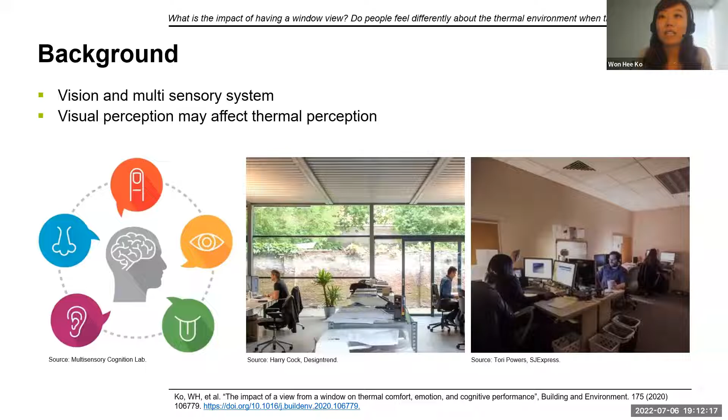So we hypothesized that having a window view versus no view would affect occupant thermal response differently.

We conducted a human subject study in a climate chamber where the system can control lighting, thermal, and ventilation conditions. By using a floor to ceiling curtain, as you can see in the picture, we created 2 different conditions, one without windows and one with windows, while keeping thermally identical spaces at 28 Celsius, a slightly warm condition. The window has 3 views, as you can see in the figure.

We recruited 86 people and exposed them to different conditions, with window versus no window, while keeping thermally identical spaces. Participants stayed in each room for about an hour while taking surveys on thermal perception, emotions, and cognitive performance tests.

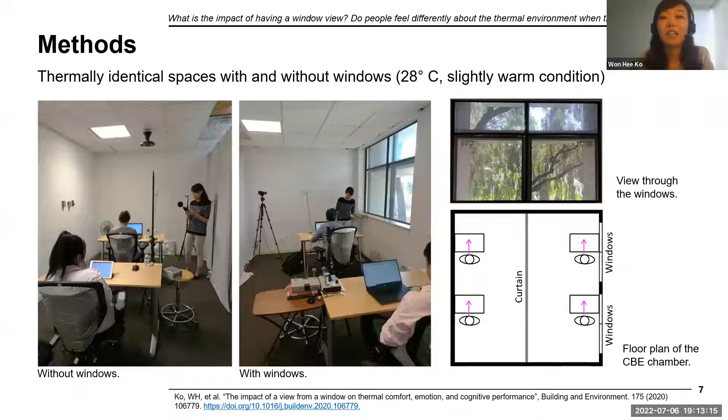When we look at the result, we found that with the windows, people felt cooler, happier, and more focused when they were in the window view room, even though we kept all environmental stimuli identical, because it was in the climate chamber at UC Berkeley CBE.

So considering these multiple effects of window access, we see that providing a window view in the workplace is important for comfort, well-being, and productivity of occupants.

The important finding here is that even though the rooms were thermally identical, people felt cooler if there was a window present. So we tried to understand how much cooler they felt.

It's about a 1 degree Celsius difference, which means 12% more people were thermally comfortable. When we simulate the building in San Francisco, California, that 1 degree Celsius difference in the thermal comfort setting results in an 8% reduction in cooling energy, as well as a 6.5% reduction in total HVAC energy.

It's really a sensational result for us, because only having a window versus no view actually makes people feel more thermally comfortable and cooler, with energy saving implications. There's also a psychological aspect, like emotions, and better work performance and concentration.

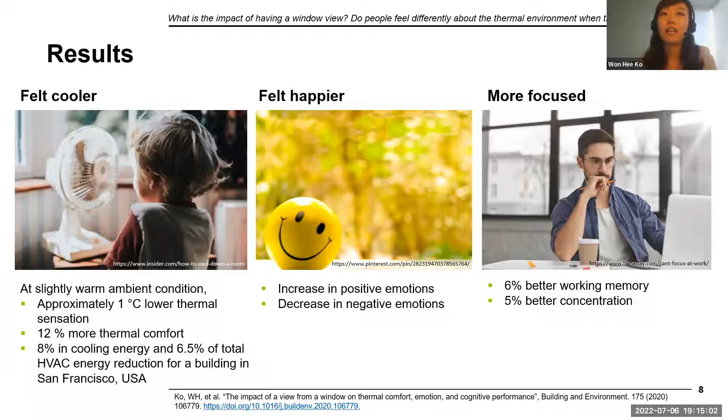We were asking ourselves whether we have enough guidelines or standards that designers, architects, or lighting designers can follow to create a good window view space. The short answer was no. So we started questioning what the major variables are that determine the quality of a window view.

So we wanted to dig up more. Michael, I, and other co-authors worked on a literature review process. Here's a methodological summary: we reviewed multiple sources, including building standards like CIBSE, European guidelines, ASHRAE, and IES American guidelines.

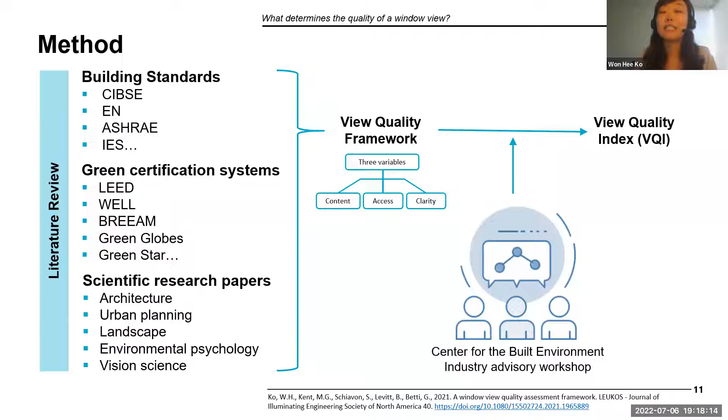First, I'll talk about the three variables that determine window view quality. If you imagine this box as a building, the first variable is view content, which is about what you see through the window. For those with an architecture background, building orientation, massing, and even site planning are important for that.

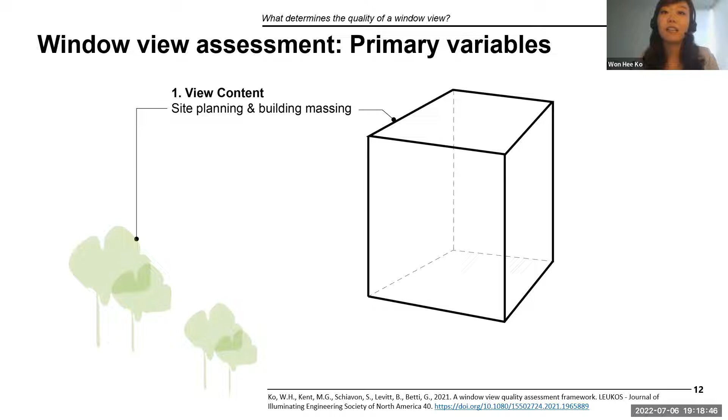The second variable is view access, which is about how much window view you have in a particular space. It's directly related to the design of facades, the building envelope, windows, and floor layout. If you're sitting far from the window, even if it's big, you may not have enough window access.

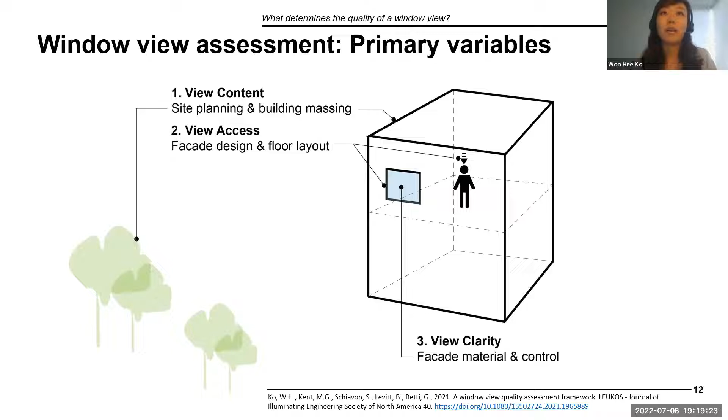The third variable was view clarity, about how clearly you can see through the window, directly related to facade materials and how we control them. All three variables matter, and together they determine overall view quality. In the following slides I'll go deeper into each variable and the design criteria we found in the literature.

The first variable was content, the sum of visual features seen in the window view. We found four main criteria: nature versus urban features, horizontal stratification, which is what kind of layers you can see in the picture, content distance, how far objects appear in your view, and also dynamic features, such as any movement.

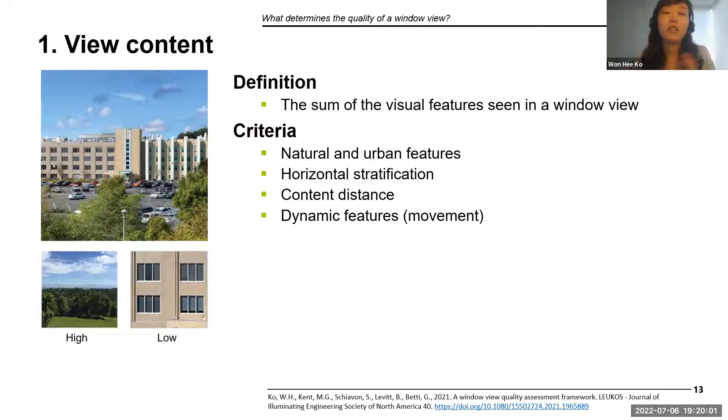For examples of what could be considered a good versus not-good view: nature is usually preferred over urban features or people. Horizontal stratification refers to different layers, like ground, buildings and landscape, and sky. If we have all three layers together, it could be considered a very good view. There's also content distance, which Michael will talk about more.

In general, far distant views are preferred over nearby views. And in terms of movement, if there's any type of movement like people, water features, or even traffic flow, you can see in the picture, if there's any dynamic features, people like it more than a static view.

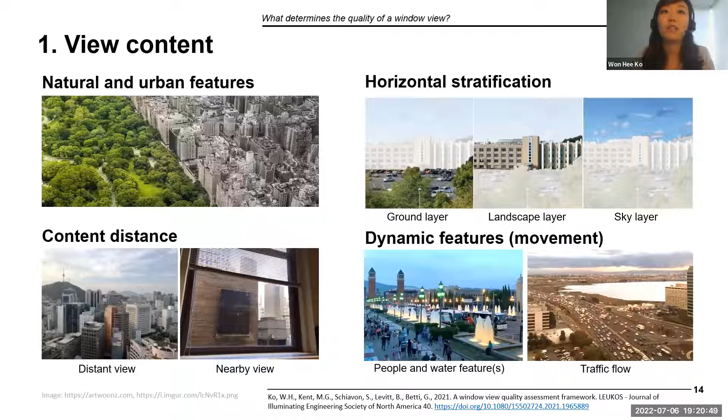The second variable is view access, which is about metrics quantifying how much of the window view an occupant can see from a particular location within a space.

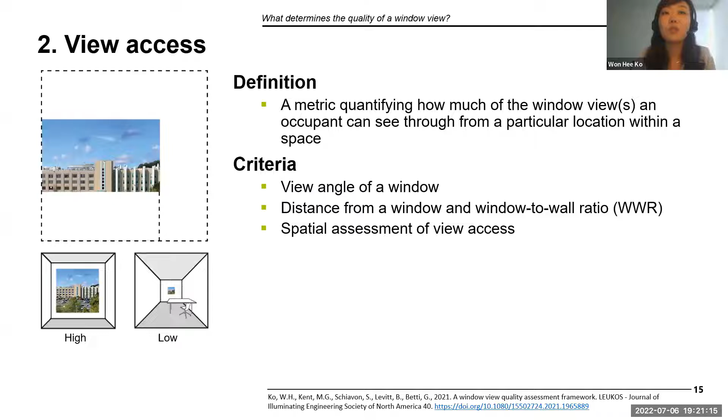The criteria we found in literature is the view angle of the view window, and also distance from the window or window-to-wall ratio, which is a common metric in architecture. We also found spatial assessment of view access.

If I describe it further, view angle is the angle from the occupant's viewing position to the vertical or horizontal window frame. European standards and LEED use the view angle to evaluate view access.

Distance from the window and window-to-wall ratio are metrics that BREEAM, LEED, and WELL use to evaluate view access.

In green certification systems, the view access requirements mostly rely on whether the occupied space has visual contact with the windows. However, the definition or requirement of visual contact is missing.

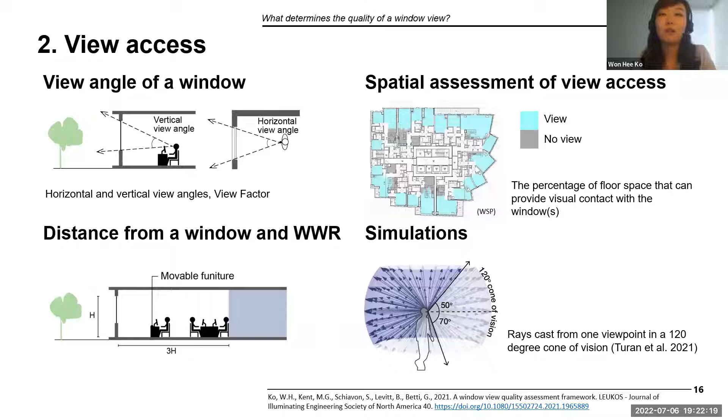The third variable is view clarity, a metric about how clearly we can see through the glazing layer. It accounts for visual obstructions present at the window before, after, and inside the glazing layers. But it is the most understudied area compared to the other two variables, though it's related to facade material, which increasingly has a lot of variation in application.

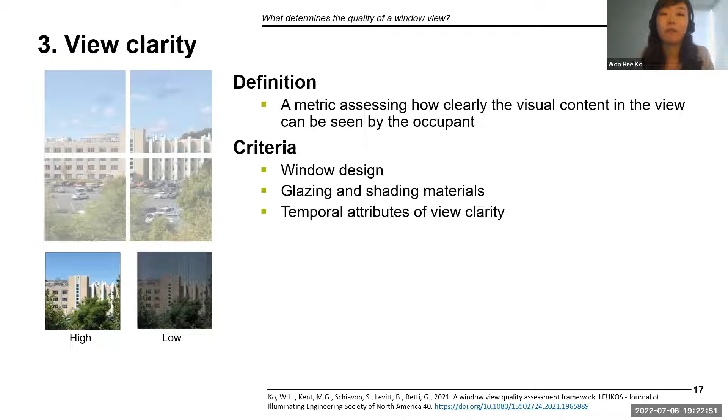There are a few aspects under view clarity. First, window design, especially the placement of glazing supports like mullions, can obstruct the view. As you can see in the image on the top left, mullions can block views abruptly if they're layered with specific views.

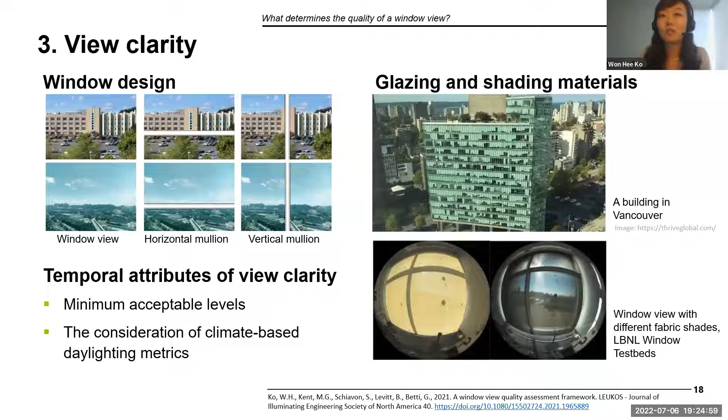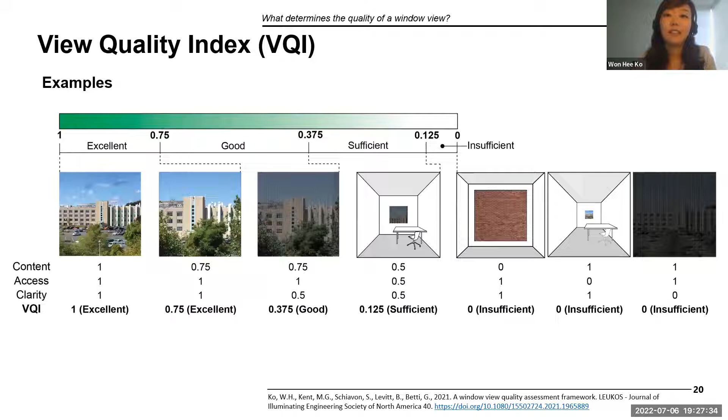So here is a summary of the contribution of this framework. First, the framework provides design recommendations and also introduced the VQI model, and it has been accessed by over 150 architects and practitioners already, and it was published in a peer-reviewed journal article. With that framework, we can provide quality views in building design, and that quality view will improve comfort, well-being, and health. This could also increase the productivity of office workers.

From a research standpoint, it was the first holistic design framework, it addressed large gaps, and it was built upon a comprehensive literature review. From now on, Michael will take over the presentation, and he will introduce more about the view content research he published.

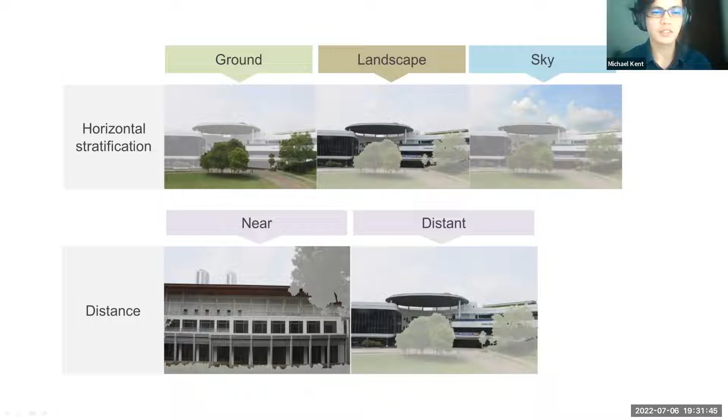And this permits any view to really be divided into a maximum of 3 layers, so the ground, the landscape, and the sky. And while any view can be, in theory, separated into a maximum of 3 potential layers, you probably would imagine that not every view will always contain each of these layers. So for example, a view of an ocean's horizon will generally only contain the ground and sky layers. Whereas a skylight on the roof will obviously only contain the sky layer and not the landscape or ground.

Second criterion, which is also described, is distance, and measures the proximity of outdoor content relative to the window. And generally, as Won Hee already described, content that is distant from the window is generally seen as being more beneficial than nearby content, since this allows occupants to see more diverse visual information, but also provides them with opportunities for visual relief, particularly after prolonged periods where we spend inside the building looking at objects that are quite close by, for example, computer screens.

And this in the long run can lead to ocular strain, like symptoms of myopia. And distant views are generally seen as a way of counteracting those negative health effects on our eyes. Distant views also offer better privacy. So they actually do help prevent people from the outside of the building from looking in through the window as well.

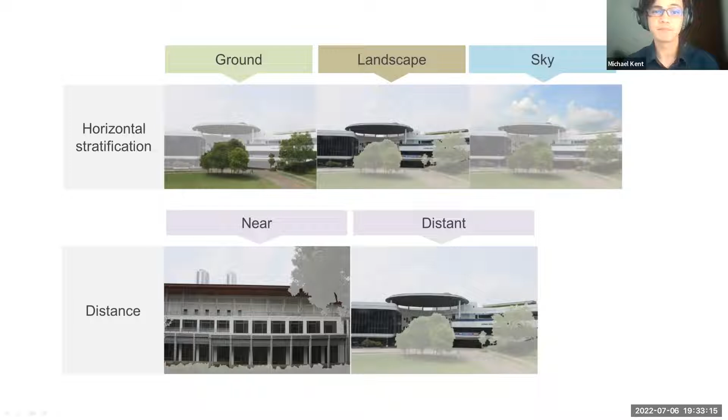So in the Society of Light and Lighting Guide 10 in the UK, and also the European norm Daylight in Buildings, both these content criteria are actually tabulated into design thresholds, which can be used to describe different levels of view quality. So in the Society of Light and Lighting LG 10, these criteria range from insufficient on the low end all the way up to excellent, where the inclusion of more layers in the view and further content distance can be used to describe higher view quality.

So therefore, to achieve an excellent view, a designer must aim to design for a view that has a ground, landscape, and sky layer, as well as have view content that is equal or greater than 50 meters from the window. On a related note, these recommendations in the European standard for daylight in buildings have some subtle differences, but generally, if you compare them, the information is relatively the same.

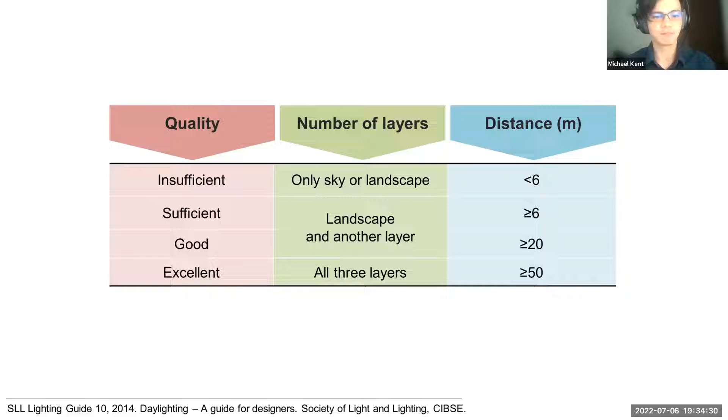So the first three studies that I'm going to describe looked at the criterion for content distance, specifically whether this criterion indeed promotes higher levels of visual satisfaction, particularly when content is seen further away from the window. And in parallel to this aim, we also wanted to know whether this effect is influenced by the content that's seen. So if this effect of content distance is universally applicable for any given view, or it actually depends on what can be seen within the view itself.

So when we began this research endeavor, a challenge that we faced was how do we measure content distance in practice, since there weren't really many guidelines given. So to get around these problems, we came up with our own method, because in practice, most views actually have a lot of complex visual information. And often this information is separated. So for example, multiple high-rise buildings are not really one continuous structure and are located at varying distances from the window. So this raises important questions in terms of which one do we actually measure, and how is this measurement representative of the overall distance from the window?

So we devised a method to overcome these problems by using photographic images from different window views, and then came up with this three-stage design process that can be applied. So in the first stage, the landscape layer is identified. Generally, when we think about content distance, this content is a reference to things that are located between the ground and sky layer. So it concerns the landscape layer. And to identify this landscape layer in the view, we used the instructions from the Lighting Guide 10, which describes two junction points located where adjacent layers meet within the view.

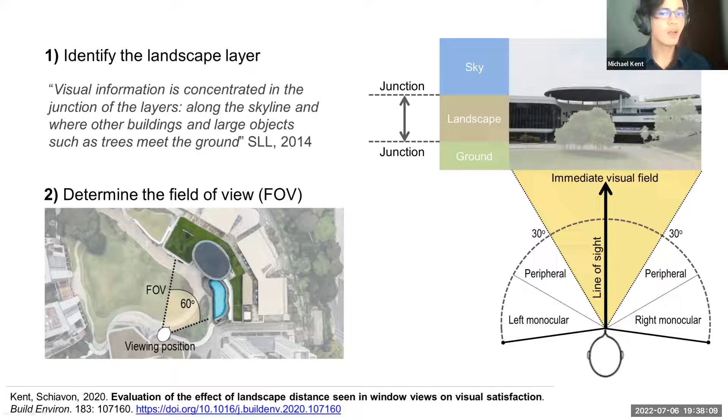So lastly, in the third stage, we calculated the landscape distance. So the method that we chose to apply utilizes two different values, which are the parts of the landscape layer which are either closest or furthest away from the window. So in other words, the minimum and maximum distances. The landscape distance is then taken as the median value of these two extreme measurements.

And this actually helps overcome issues when, for example, these two different measurement points are considerably different from each other, which means, if this is the case and an architect or a designer selects one or the other, but not both, this can probably lead to very different interpretations for what the content distance actually is. So for example, if the designer specifies the minimum distance, this could translate to an insufficient view, whereas if they select only the maximum distance from the window, this could conversely translate to an excellent view, which obviously causes some problems in practice.

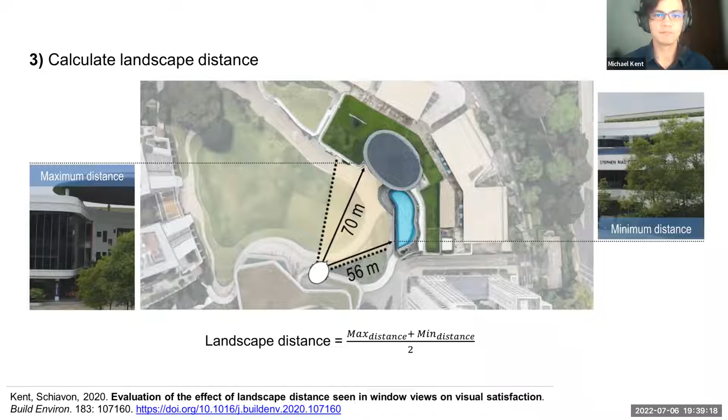So to quantify view perception, this was measured by the satisfaction or dissatisfaction given to three different parameters, namely connection to the outside, visual content, and visual privacy. And collectively, we assumed that this would give a complete picture of what people are seeing in the view and how they appraised that information.

So connection to the outside was used to describe the provision for dynamic information seen in the view in terms of, for example, temporal changes that could occur, such as the time of day, weather, people that may occur on a regular basis. And this parameter, connection to the outside, is often seen as being one of the most important things people actually need in a view that decides their preferences towards it.

The second parameter is visual content, which describes directly what can actually be seen in the view itself. And this could be, for example, nature or buildings. And the last parameter is visual privacy, which describes the feeling or perception of people from the outside being able to look in, which obviously creates a sensation of discomfort if this happens on a regular basis.

As you might imagine, it's not particularly straightforward how connection to the outside or visual privacy for pictures or static content can be evaluated. So what we did was we asked participants to imagine that these views contain certain visual cues, for example, a nearby pavement or a nearby road. And these cues are representative of either good or poor connection to the outside or visual privacy.

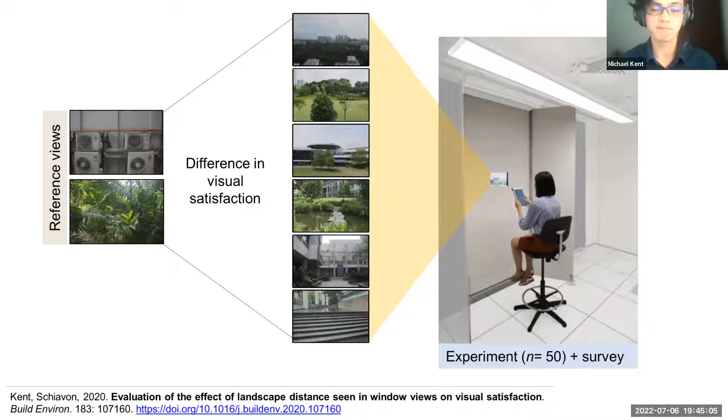Okay, so does visual content also matter when considering content distance? Well, generally, yeah, the answer is yes. The visual content does matter. So if the view contains a lot of nearby nature, the effect of increased content distance is actually much smaller. What we also found was that there was no significant increase at all that we could detect.

Whereas if we have nearby urban features in view, such as these nearby air conditioning units, this effect of increased content distance is significantly larger, as indicated by the percentage changes that are illustrated in the two boxes. And this really raises seminal questions as to whether this distance criterion can be universally applied to any given window view, regardless of its content.

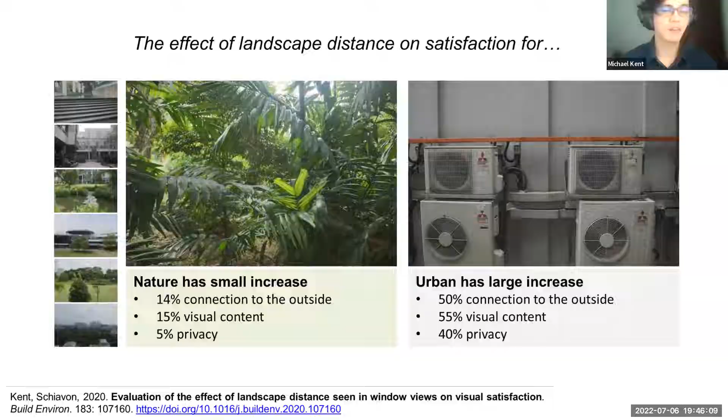Okay, so besides horizontal stratification and content distance, the lighting guides also provide recommendations used to evaluate 5 other environmental information criteria. However, based on our review of the scientific literature, we couldn't find any studies that evaluated their practical viability. So these criteria, when laid out in a tabular format, describe 5 different aspects of the window view, namely location, time, weather, nature, and people. And the inclusion or absence of any of these describes the level of view quality according to the same 4 design thresholds indicated before, which range from insufficient all the way up to excellent.

So the aim of our work was relatively straightforward, which was to evaluate the practical utility of these 5 different environmental criteria. So in other words, if we provide subjective evaluations to each of these 5 different criteria, can they be used to predict differences in window view preferences?

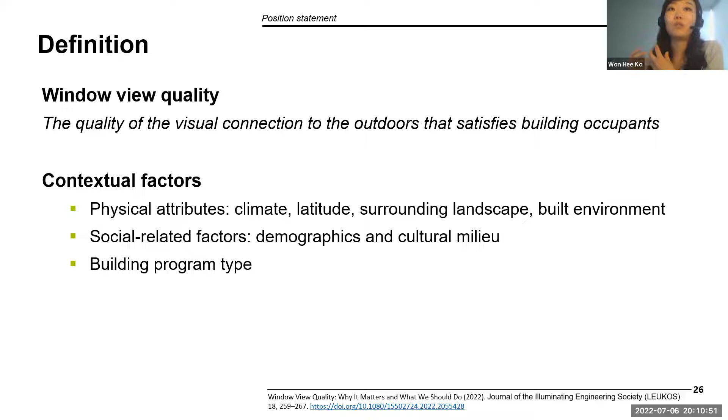And then we kind of talked about three different variables and what should be done. And then there's three aspects we should research further in terms of content.

One of them is nature views. Paolo, you kind of asked about the wall, and we talked a lot about various forms of nature, like green walls, green facades, or greenery within the space. If it's gonna have a similar effect as a nice green view outdoor, it's not studied really thoroughly, so it could be one aspect to be considered for students or researchers for future study.

And then the other one is human man-made views. There's a lot of emphasis on nature is good and urban setting is not so great, but we found that there's artifacts, as you can see in the pictures in the middle, like a really nice architecturally well-organized sculpture that can actually create pretty good positive effects to the occupants, even though it's not nature. Those are things we don't have much understanding of, so it can be researched further.

The last part in the content is movement in the views. We know it's like scale—if it's big movement or small movement, how frequently it's moving, and how periodically it's moving. That's all a relevant question to answer, because for example in classrooms, if there's really big things moving right next to the window, kids will not focus on what the teacher is instructing. So those are the relevant topics that should be researched further.

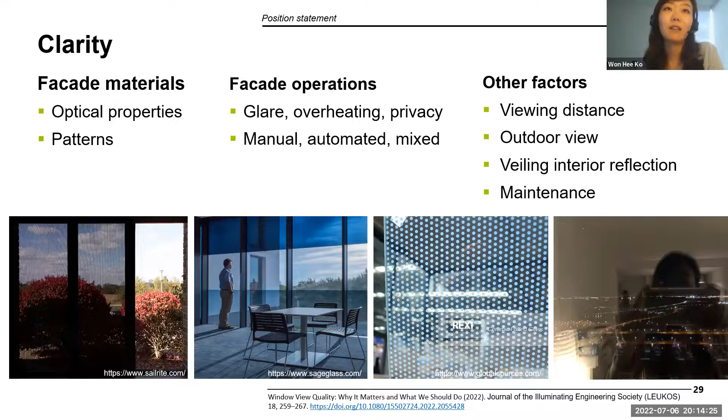The very last point we discussed in the group, the symposium, and the in-person workshop was how we can integrate all these three different variables into the design process. One thing we all agreed on is that our assessment tool or guidelines should have enough flexibility for the design team to adapt variables that meet design requirements, and it should allow balance among the three different variables.

We do need a lot more empirical research, meaning we should have more research with human subjects to understand better about human perception. For that, we need to use a lot of different research methods—it could be lab or field study in a real space, or 2D or 3D images, or virtual reality environments, to answer Paulo's question.

When we do that experiment with human subjects, we should be able to observe the satisfaction response curve and try to understand what design threshold we can propose based on that result. So that will be the end goal: to integrate window view quality as one component in the performance space of the design workflow, where lighting, thermal, and air quality are already pretty much set up and people are using them to address early design decisions, but window view quality is not there yet.

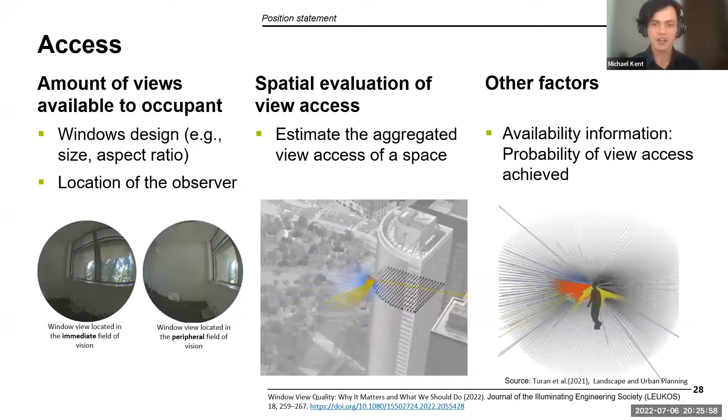Something I neglected to mention in my presentation is that out of the three design elements we've raised - view content, access, and clarity - probably content is the most difficult to design for, because when you're given a site, that's your view of the surroundings. There's not really a lot of flexibility if the view outside is not particularly great, because that's what you inherit. Even with good site orientation and massing, that doesn't necessarily get around those problems. That's probably a caveat of designing for content.

As an alternative, what we proposed in our framework is that if the outdoor content is not great - for example, there's not a lot of nature in the view, like in a very dense urban city center - then what you could potentially do is integrate those features within the architecture itself. For example, a courtyard or indoor garden would be an alternative, biophilic features for example. These could help alleviate problems of designing for view content when the window view itself doesn't have great content. This adds more flexibility - in a worst case scenario, you can still do this, and it may lead to a positive effect.

For sure. And that's also partially reflected in some green certification systems. I think Singapore's green certification already has credits if buildings include an indoor courtyard or green facades to mitigate that effect. It's not universal throughout the standards, but I think we see more and more biophilic design aspects included in building standards or green certification systems.